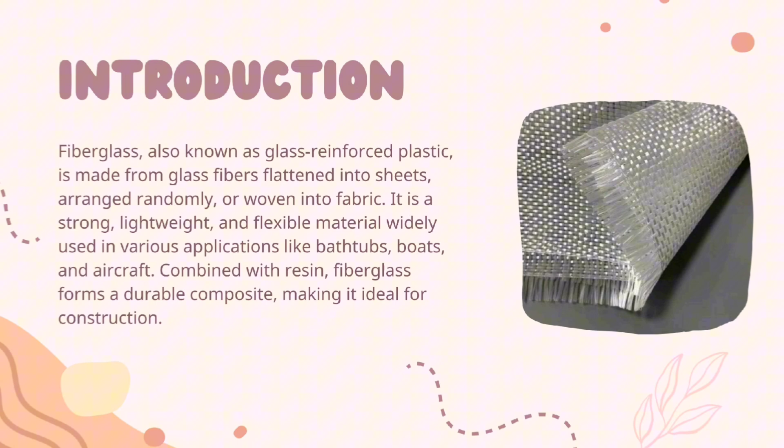There are a few research questions. Number 1. How does fiberglass waste impact the strength and durability of concrete? 2. What are the environmental benefits of using fiberglass waste in concrete production? Number 3. How can fiberglass reinforced concrete be implemented in the Malaysian construction industry?

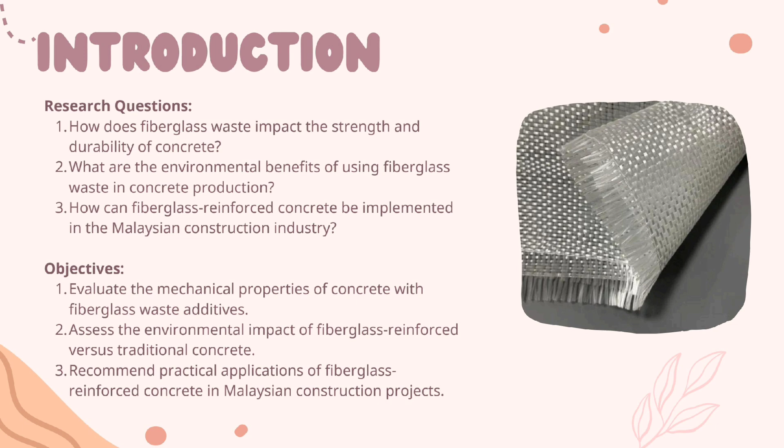The objectives of our project are to evaluate the mechanical properties of concrete with fiberglass waste additives. The second one, assess the environmental impact of fiberglass reinforced versus traditional concrete. And the last one is to recommend practical applications of fiberglass reinforced concrete in Malaysian construction projects.

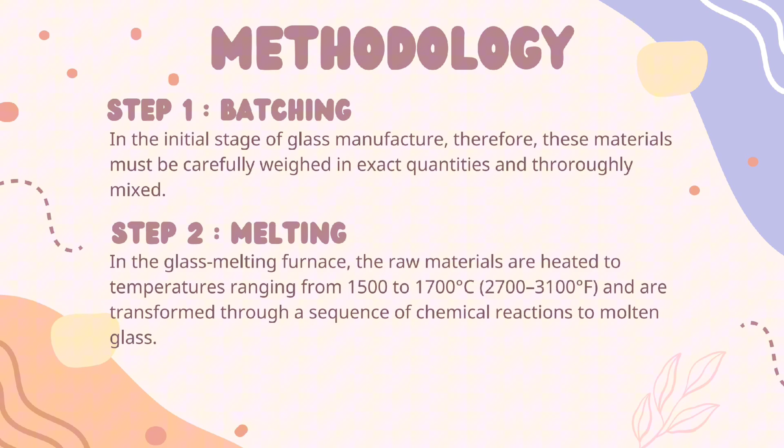For the methodology, step 1, batching. In the initial stage of glass manufacture, these materials must be carefully weighed in exact quantities and thoroughly mixed. The next step is melting. In the glass melting furnace, the raw materials are heated to temperatures ranging from 1,500 to 1,700 degrees Celsius, which is 2,700 until 3,100 Fahrenheit, and are transformed through a sequence of chemical reactions to molten glass.

Next step, coating. In the final stage, the filaments are gathered, twisted into a forming package, and then processed into a textile or other reinforcement forms by weavers or other converters. The lubricants help prevent them from abrasion and breaking.

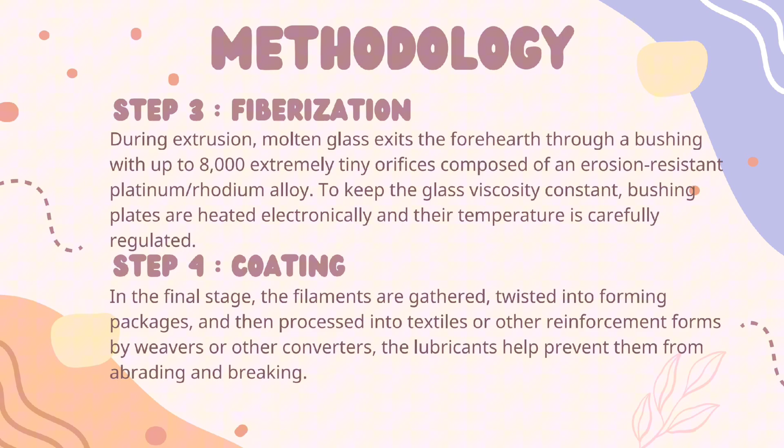And then the last step, which is drying. Finally, the drawn and sized filaments are gathered into a bundle to create a glass strand that can contain anywhere from 51 to 1,624 threads. The strand is formed into a forming bundle that resembles a spool of thread by winding it onto a drum.

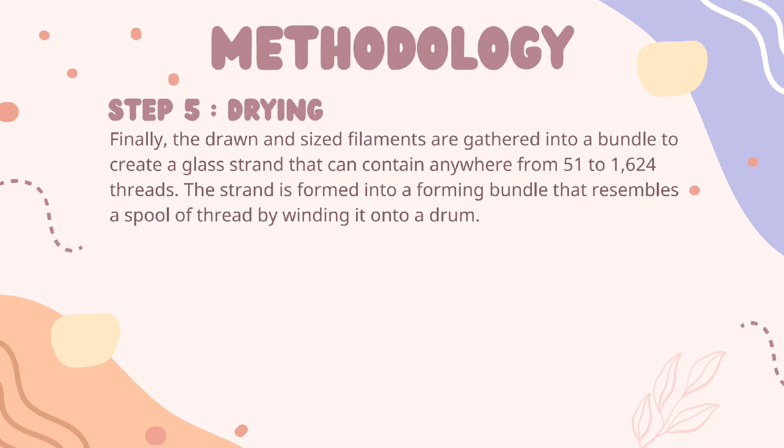The findings for our topic, fiberglass, are firstly, the benefits of the products. The benefits of fiberglass products can be classified into 5 types. First, higher strength. Second, corrosion-free. Third, stable properties. Fourth, good molding ability. And lastly, sustainable.

In terms of higher strength, the strength is at the same level as steel, but only at a quarter of the density. It is also possible to make weight savings in comparison with aluminium, as the density is 30% lower. The structural profiles have an elastic modulus of 23,000 to 28,000 megapascal. This ensures excellent rigidity and makes the profile particularly well suited to construction tasks that require great strength and low weight. For example, fitting balconies where a reduction in the weight and installation time is required.

Second, stable properties. Fiberglass has high fiber content and a low water absorption capacity, which is only 3%. This means that its properties remain stable throughout the entire lifetime of the product. The third one is corrosion-free. Corrosion-free profiles are resistant to the effects of wind and weather and aggressive liquids. This makes them ideal for use in industry, construction, and offshore installations, for example.

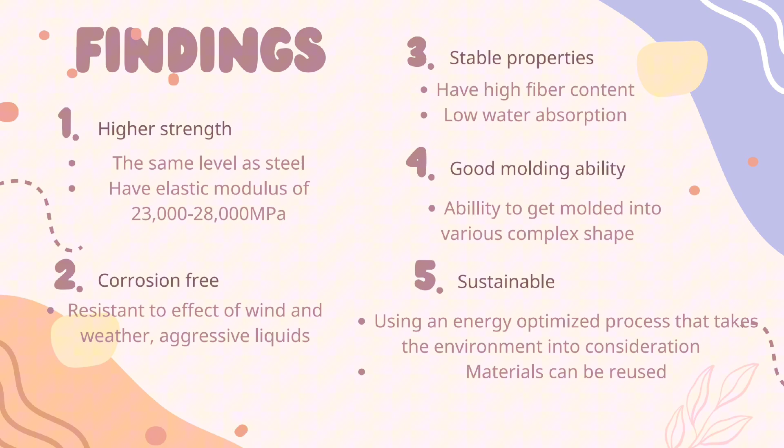And lastly, fiberglass is sustainable. Due to its composition, fiberglass is known for its very low embodied energy, the total energy required to produce a product from the raw material stage through delivery of the fiberglass product. Fiberline fiberglass profiles are produced using an energy-optimized process that takes the environment into consideration. In addition, the material's excellent durability means that very few maintenance resources are required. The materials can be reused when they are no longer needed, for instance, in cement production.

The next findings are the comparison between glass fiber and other materials. In this comparison, we compare glass fiber with carbon fiber in terms of three types, which are strength, secondly rigidity and toughness, and lastly thermal expansion.

In terms of strength and weight, glass fiber has a strength to weight of 564, while carbon fiber has a strength to weight of 1013, nearly twice as strong. This high strength relative to weight means that manufacturers need to use far less carbon fiber when pultruding a given product. As a result, pultruded carbon fiber products can often get away with significantly thinner cross-sections. This can be simplified as glass fiber has a lower strength compared to carbon fiber.

Next, in terms of rigidity and toughness, glass fiber is less stiff and has low rigidity. This level of stiffness, with its relatively supple nature, is a far better choice for applications that entail high flex patterns. Meanwhile, carbon fiber, being relatively rigid, may not be suitable for those applications.

Meanwhile, for carbon fiber, the higher rigidity allows manufacturers to meet far more precise stiffness needs. For instance, the silicon tracker modules inside of CERN's Large Hadron Collider require a degree of stiffness that only carbon fiber pultruded profiles could supply.

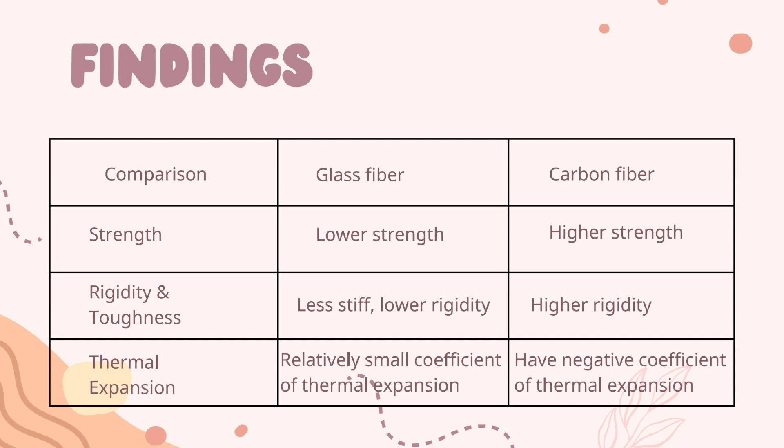It actually has a negative coefficient of thermal expansion. As a result, carbon fiber expands as temperature goes down. How the materials are being used or could possibly be used: glass fiber is widely used in construction, civil engineering, commercial and residential products, aircraft, roofing, and sporting equipment.

The second one, typical applications include the use of glass fibers in polymeric resins for paneling, bathtubs and shower stalls, doors, and windows. And the last one, glass fiber is also used as reinforcement in a variety of household items such as papers, tapes, and lampshades. Some special alkali-resistant glass fibers have been developed for reinforcement of cement and concrete.

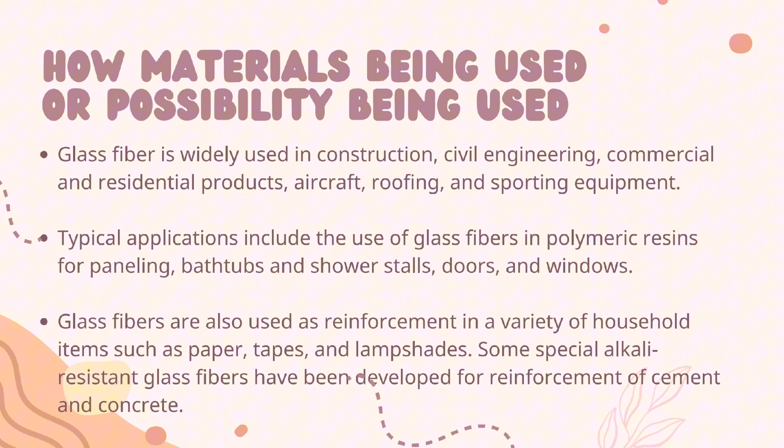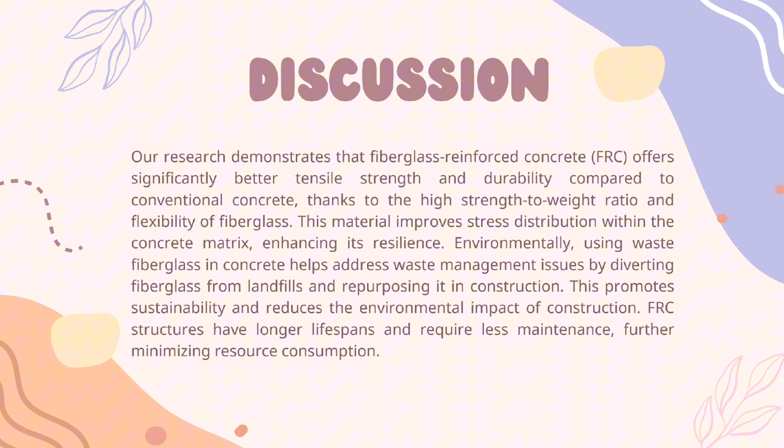Environmentally, using waste fiberglass in concrete helps address waste management issues by diverting fiberglass from landfills and repurposing it in construction. This promotes sustainability and reduces the environmental impact of construction. FRC structures have longer lifespans and require less maintenance, further minimizing resource consumption.

However, challenges remain for widespread adoption in Malaysia, such as higher initial production costs and the need for strict quality control due to variable fiberglass quality. Compared to other sustainable alternatives, FRC excels in strength but may not be as cost-effective or environmentally friendly as options like recycled aggregate concrete.

Further research should focus on optimizing mix design and processing methods to improve cost effectiveness and performance consistency. Additionally, long-term field studies are needed to fully understand FRC's economic and environmental impacts.

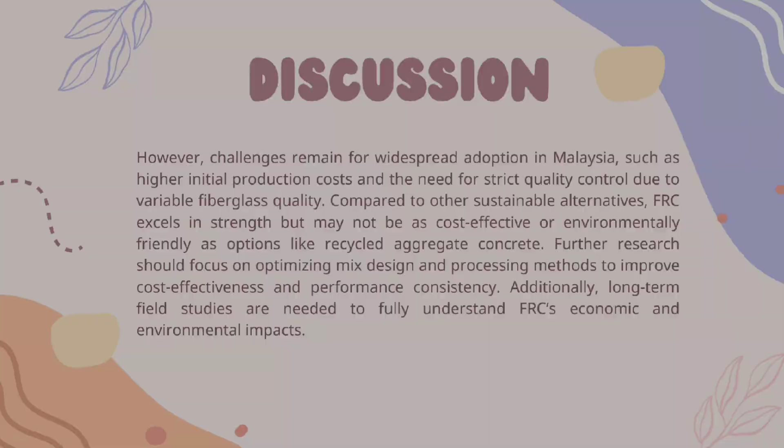Conclusion. Our research confirms that fiberglass reinforced concrete (FRC) is stronger and more durable than conventional concrete, addressing the primary research question about its effect on performance. Using fiberglass waste in concrete also reduces landfill waste and lowers the carbon footprint, aligning with our environmental goals.

Despite challenges like higher initial costs and specialized manufacturing needs, FRC's benefits of improved durability, reduced maintenance, and sustainability make it a viable option for the Malaysian construction industry. This study meets our objectives of evaluating FRC's mechanical qualities and environmental impact, offering practical recommendations for its implementation. Further research is essential to optimize and fully realize FRC's potential in sustainable construction.